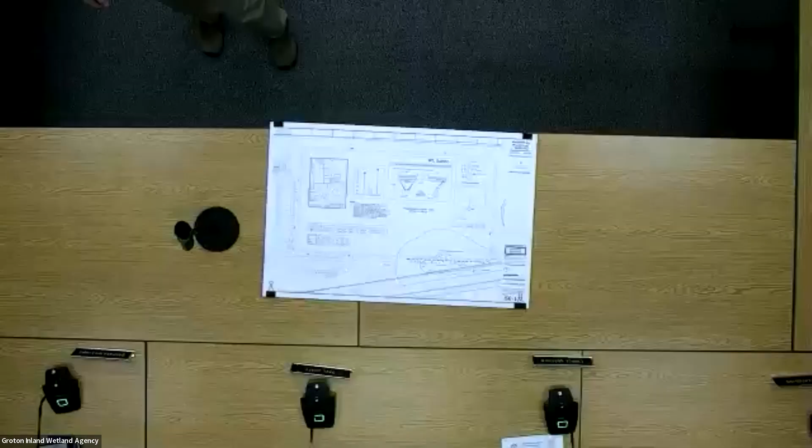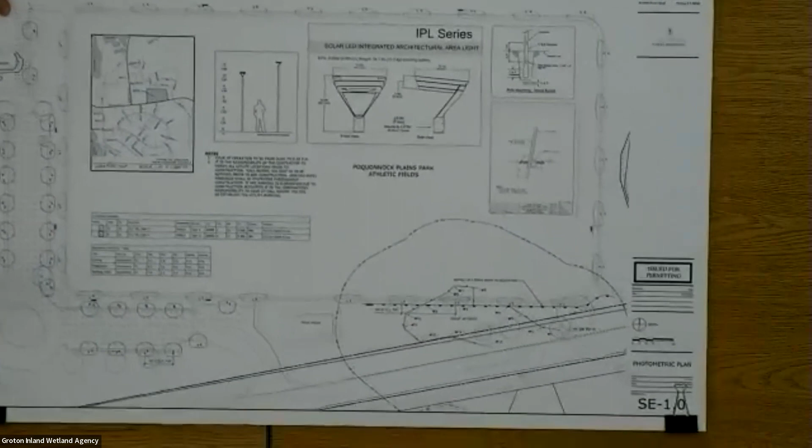This is Chad Frost from Kenton Frost. They were the landscape architects that put this plan together. And we also have the soil scientist that did the work, James Cowan. He is available if anyone has any particular questions about the soil.

As far as I'm concerned, from all the work we normally do, this is probably one of the easiest ones. So this is Poquonnock Plains Park. This perimeter is the walking path that we're all used to. What's labeled here, the field house, that's the bathrooms, the concession stand, the boulevard parking as you come in, this is the parking lot. Obviously, all of the circles are the lights that are proposed, as Mark mentioned.

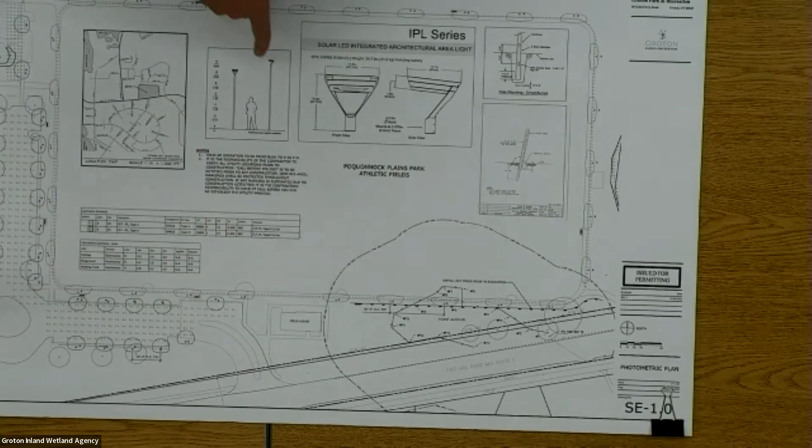They are all solar powered, so there's a solar panel on top of the fixture, the lights and everything underneath of it, and then it's a simple pole, direct burial. The only digging, the only soil excavation, is just for the pole, so we don't have any wiring, we don't have any conduit runs.

And as Mark alluded to, and as you've probably all seen as you drive along Route 1 in Fort Hill, this area is poorly draining down in that area. It's not a functional wetland, it's 100% lawn, it's mowed and maintained. And the walking path kind of just goes through the edge of it, as was flagged.

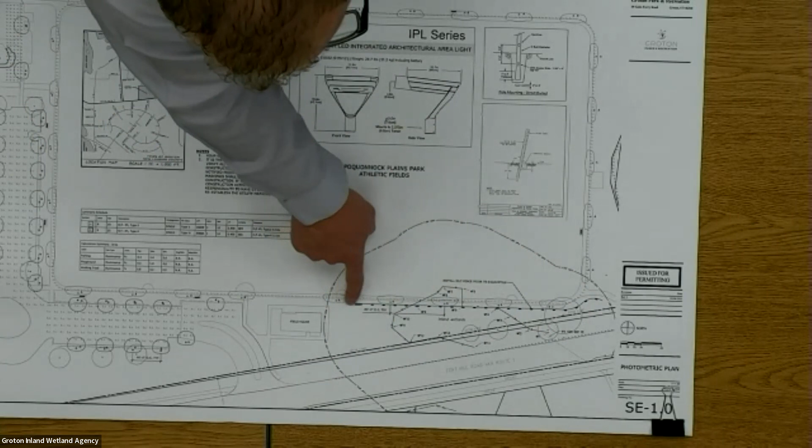It is slowly draining, but we have basically this light, that light, in that upland review area on this side. We have one light right there, and then these last two here within that upland review area. So extremely minimal disturbance, because it's literally just the pole itself. This is not going in with concrete, so it's literally just the pole, direct burial, recompact the soil that came out of the hole, and the light goes on, and that's it.

So I think extremely simple. I would say it's a dark sky compliant light fixture—nothing goes up, everything goes down. There is photometrics on here. These are very dim lights, they are not casting a ton of light all over it. It will be great to have the pools of light out there, but it really will be pools of light from pole to pole, as opposed to floodlights like you might be used to on athletic fields. So an extremely low level amount of light, just to provide safe access around.

And that's my short introduction.

Excellent. While you have James here, do you want to talk about the wetland for the agency? Promote him or just let him talk. Oh, these are his hands. They switch—oh wait, oh there it is, okay, there you go. Can you—perfect, okay, can you hear me?

Yep, yes, okay. Yeah, I guess the main thing I'd say is the main function of this wetland is drainage. It's at the low corner of the field, so any runoff or groundwater would enter this area, and it exits via a culvert in the southeast corner of the site. Where I have reviewed the plans and where the—

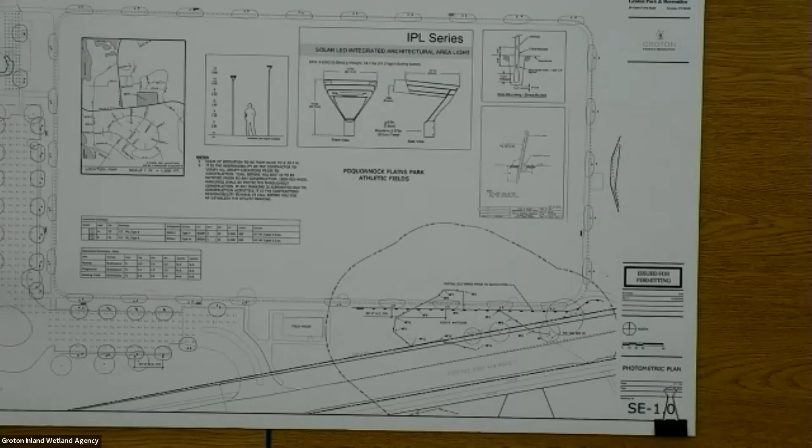Let me just say, do you think that we need some more presentation from these guys? Just saying. Thank you very much. Thank you very much.

All right, any other new applications that are not on this little list? Pending applications - Durr Driveway, 0 Elm Street South, Noank. I am promoting Ed Wenke, who is the engineer for that project. All right, Ed, they were...

Can you hear me now? Yep, we can hear you, Ed. Okay, the map - well, what are you gonna share? Are you gonna share your screen, Ed? I can do that. Okay, otherwise we can put ours out. I'll do both. Let me just make sure I'm doing the right one here. Can you see my cursor moving? Ken, does that sound muffled to anybody but me? Yes, he does. Am I just losing my hearing? Very much. Okay, sorry about that. Can you all hear me? Hang on Ed, something's funny with the audio, it's because we're trying out a new system. Okay, it's not me.

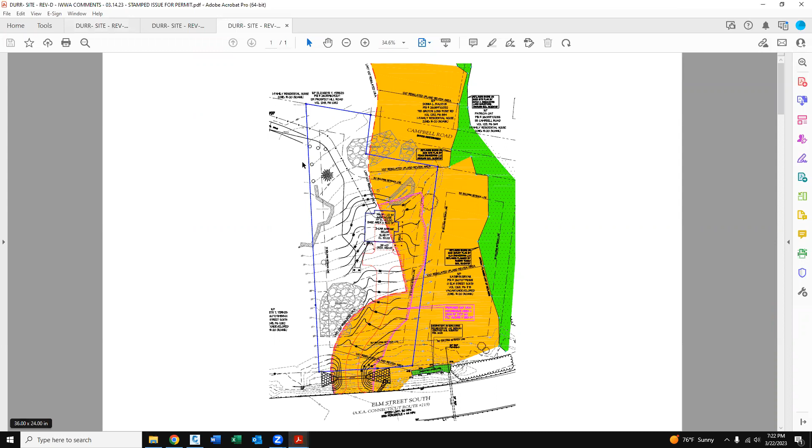The house itself is going to be 94 feet from the closest wetland. They say 94? 94, correct. That's the house itself. Basically, the limited disturbance line is running this line to the wetland area, that's going to be approximately 70 to 75 feet.

And you need to just be over there to have all the machines, is that right? We need to be there to catch grade as we're going to be grading this slope out to build the house. Okay, yeah, okay.

I guess I'm just wondering, maybe if we should consider having some plantings in there so that the people that mow don't get over-enthusiastic heading towards the wetland. Well, this isn't our property, so we wouldn't be mowing. I know that's not, but still since that whole corner is still in the upland review area, you know what I'm talking about? I get that they would want to mow around the house, but maybe just some plantings.

I don't know what that squirrely line is right there. Yeah, that's right, that's a limited disturbance. Yeah, this is the limited disturbance right here. That's the staked limited disturbance.

That's the edge of disturbance. So I'm just wondering if we might have a row of plantings, not trees, but shrubs there, wetland species shrubs.

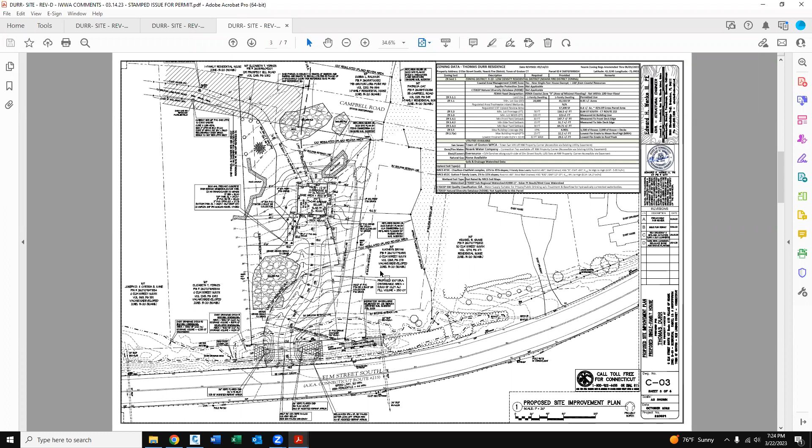It's so tight in there. So what he had said was the owner may want to put a fence there to keep them away from the wetland. That was one thing that maybe... I lost the audio there.

Ed, you still there? I'm still here. Can you hear me? Yeah, we can hear you. Okay, I can't really hear you. Yeah, I'm having a real hard time hearing you.

Yeah, the audio is pretty quiet right now. There we go, I can hear you. Can you hear me okay? Yes? Hello?

Well, if you can hear me, I just want to point out another thing we added here. We did add native shrubs and plantings in the lower southeast corner, along the lower portion of this slope before it hits that drainage ditch. So we've got a planting schedule, we're putting pepper bush in and some inkberry bush in.

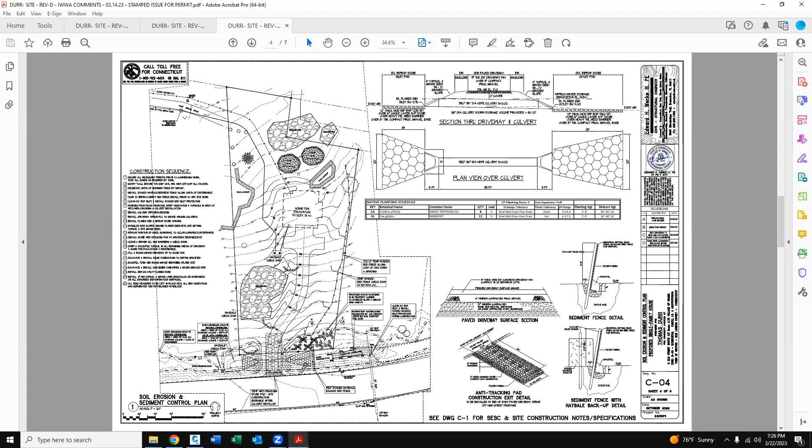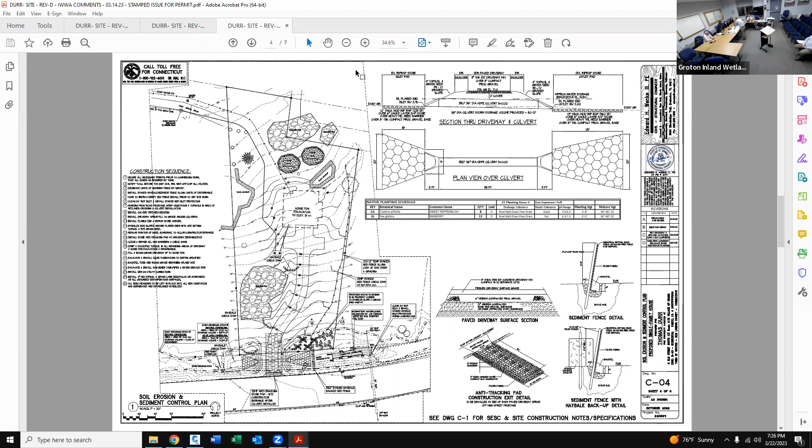Boy, I'm having a hard time hearing. Okay, so right now Dave is showing the agency our shared screen, versus the area where there's the big... This is Courtney, I can't hear either.

Can you hear me when I'm talking right now? I can't, I mean just barely. We're just trying to do the best we can, and I think we have a good sense of this.

So now could you just talk to me about the fence that you were just talking about? One of the things Ed had mentioned was that it's very tight between the upland disturbance, the limit of disturbance on the western side of the property. He said that the owner may be considering putting a fence along this edge here, which would keep them off of that.

I think this looks like it's about 25 feet, between the grading and the property line. Are we still sharing screen? Okay, I've got it right up here, you can see this line if you follow my cursor. That's the silt fence and the limit of disturbance, right up against the property line. There's no space, so the silt fence and the limit of disturbance is right up against the property line.

Now what, I mean that's basically the disturbed area, so I'm not sure what planting bushes along that would do. I guess what I'm saying, Ed, is I'm not talking about going towards the property line, I'm saying after your construction is finished, then you might put...

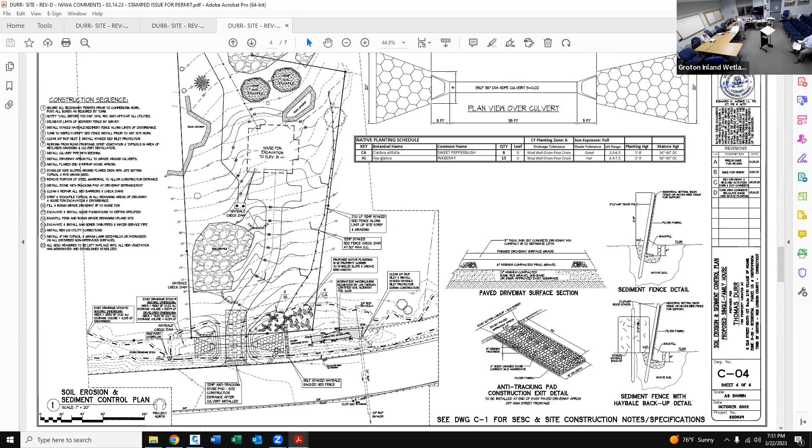That's what. Ed, do you want to stop your share? Plantings. And then you can see what they're pointing at.

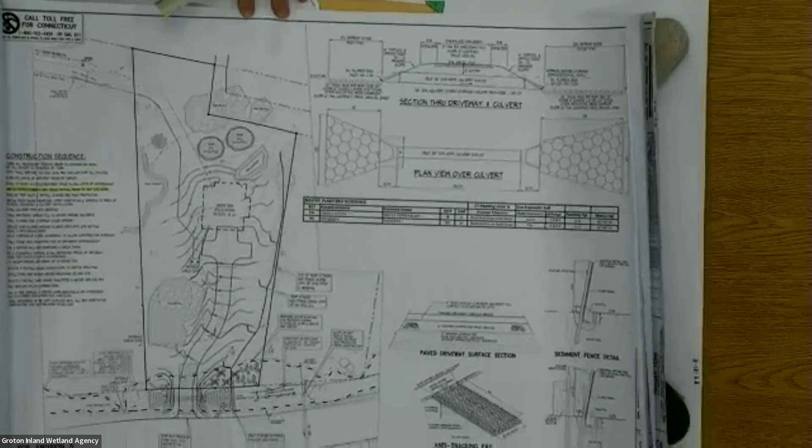You want to point in there again so we can see it specifically? So I would like wording in the motion that defines the limit of disturbance from here to here, please. All right, yeah, I mean, that is the property line essentially, so they're not authorized to go over the property line. So you just want to push the property line in 10 feet. Yeah, 10 feet, that's where the silt fence is essentially on the property line there.

All right, well. Okay, I guess that shoots that down.

I have a question regarding number one here. Since a good portion of the property is in the wetlands, the upland review area, how does this apply - to the entire upland review area or only the area east of the house?

The second line, the second one: this permit is subject to the standard conditions, blah blah. Wait, so I'm trying to understand which part, are you talking about the first part or the second part? Second part, right. There's no clearing, cutting, alteration, or dumping of materials shall occur within the upland review area that is not specified on the approved plan.

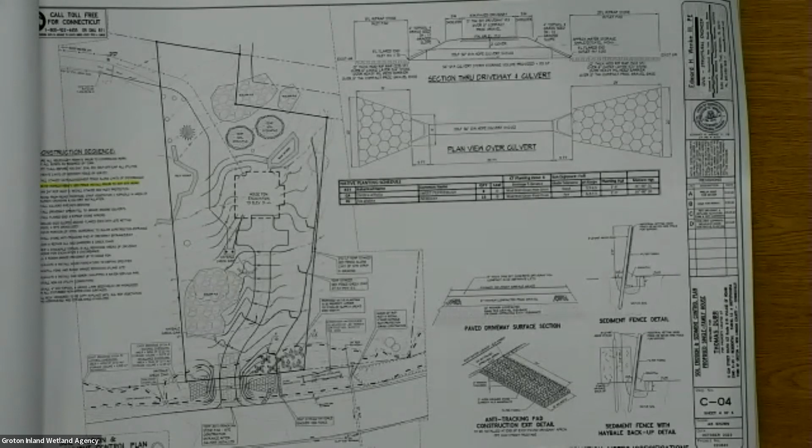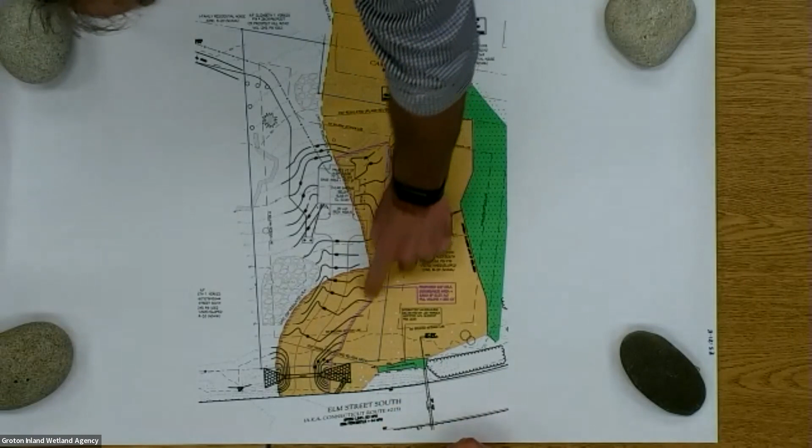You know, what else - it seems a little weird that the erosion controls don't cover the slope underneath. It's to the side, it's not below the house. So where you'd expect water and erosion to happen - the controls, I'm pretty sure, are coming down the whole. This mark right here is actually the erosion controls that follow it down, that basically follow the contours of the driveway and the house itself. So that makes - they're E&S in place.

Okay, so what's your question, Amy? Once again, nothing to do with the wetlands, just keeping the soil on the slope.

Well, I mean, we'd like to assume that good E&S accomplishes that - if it's attended to and if it's made sure that the plastic is in, the hay bales are there. You have hay bales and plastic, right, Ed? Yeah, we have sediment fence and sediment check dams running along the side of that sediment fence. We also have hay bale check dams coming down the drainage swale. So yeah, we've got plenty of sediment containment.

So what it's showing you, I'll mention it.

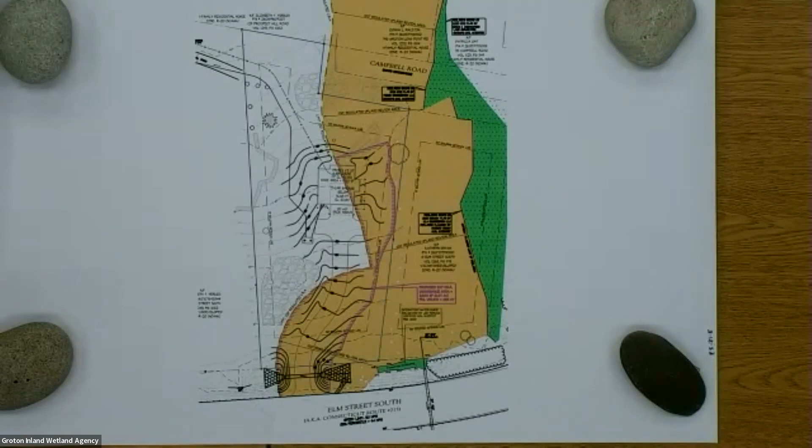So right there, while they're doing the work, you can see these are actually hay bale check dams - there's one there, one there, one down below, another one over here. That was the thought too, with putting the plantings down here to protect the water, the intermittent water course down in the area.

Now, you're proposing to add vegetation here. Are you talking the whole section from the house all the way down, or? Well, to me, it would be awesome if it was all the way down. It seems like it'd be kind of nice if they just carried that up. Visually, it would be nice, but.

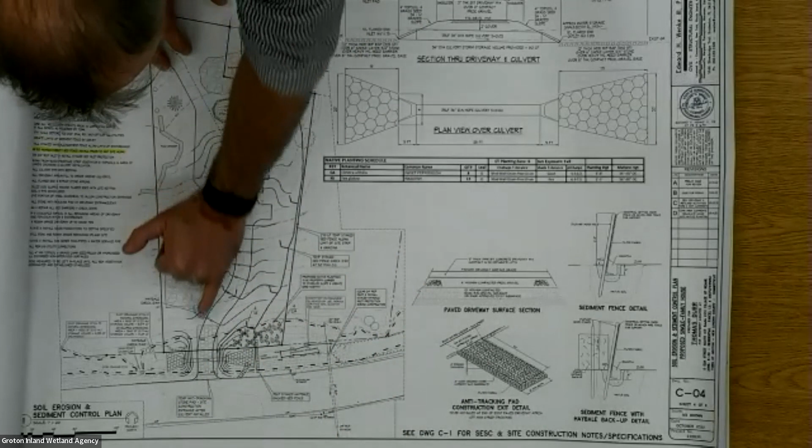Are there hay bales here too, along with the silt fence? No, not on this side. I think most of it's actually sloped towards the other side. You can see there's a swale depression on this side. So I'm trying to speak to Annie's concern about loss of material towards the wetland. I didn't realize there were consecutive ones. So you're good with that? I'm good with that.

All right, your concern is post-construction. Right, not during construction. That's correct, that's why I was looking at this from the standpoint of post-construction. And not necessarily what's on the building plans, but subsequently what the owner was going to do.

Well, but if we condition this, it'll be on the plan that they're going to plant. But they'll have to put those plantings on the plan.

All right, does anybody have any words for what I'm trying to accomplish in number 2? So you would like to say native plantings - let me clarify, you were saying 10 feet on the inside of where the sediment fence was? Yes, please. All right, so basically native shrubs shall be planted 10 feet off the limit of disturbance on the east side of the property, post construction.

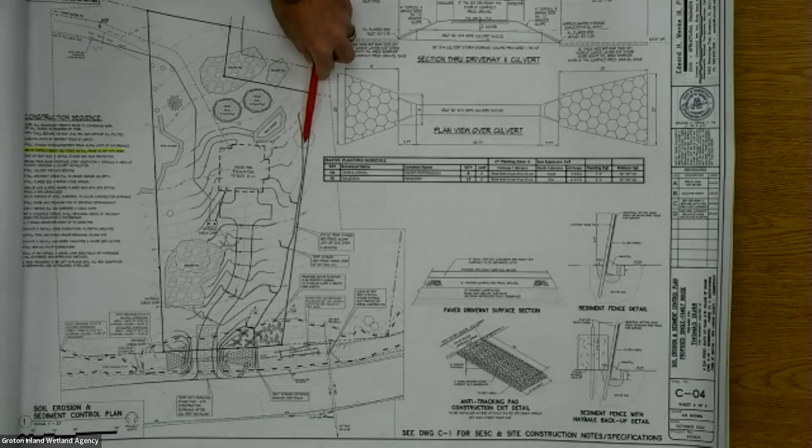I think along that whole property line, yeah. There isn't, I mean, there is - native existing shrubs and trees planted too, that's shown on this up here past the house. So when you say the house, you want to go basically from here all the way up to the existing tree? Yes, okay.

West, 10 feet west of the limit of disturbance. Can I ask one thing on this? Can you all hear me? Yeah, yes, he wants to ask a question. Yeah, go ahead, Ed. Again, Ed, I can hear you, I just can't understand you.

Oh, I'm sorry. If the owner decides he wants to put a fence in down his property line - that's where I thought we had the issue - that would basically address your issue of no encroachment any closer to the actual wetland.

So you're saying it's less disturbance and what? No, it's possible that the owner may want to install a fence along there rather than shrubs. And we're not talking about a stockade fence - it could be a post and rail fence, something low profile. I don't think anybody wants anything high there because everybody wants to maintain the views.

But the main concern is future encroachment of lawn mowing or clearing closer to the wetland than our property line, which we know we can't do anyway - the property line is going to stop us. A fence will stop you. And I'd like to be able to give the owner those two options of either providing the plantings or putting in something like a low profile fence. Does that adequately address what you're looking to do?

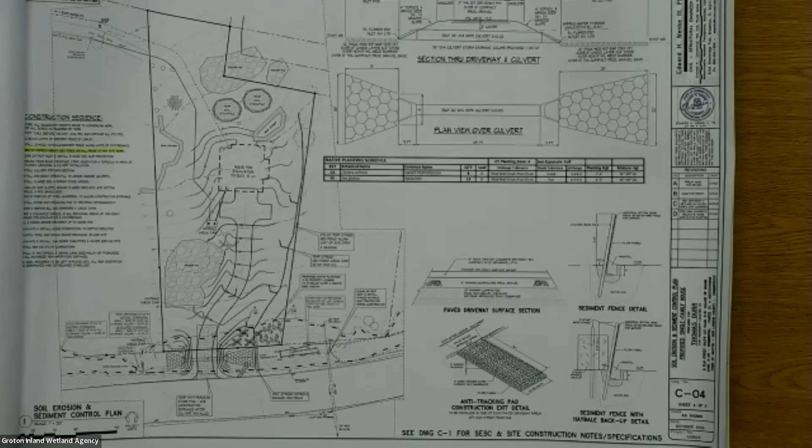Thank you all, appreciate your time. Thanks, Ed. If you have any more applications, you better come here - he's in Florida. All right, y'all take care. All right, thank you. Bye. Thanks, Ed.

All right, now we're on pending applications, Brown New Home. Oh, I hope - oh, thank goodness he's here. Yes, yes.

So far, so good. Did you? It's crazy. It's not just - yeah, no, I have my hearing aids on, so I couldn't hear much. Okay.

Okay, I'm Paul Lucier, I'm the builder of the house at 49 Prospect Street. And well, I think I've met you once before - Barbara Williams - with these folks a few times already.

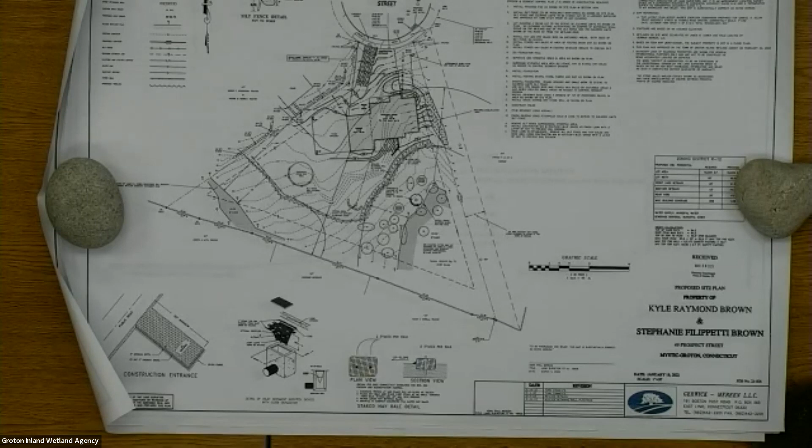Where is Prospect Street? Prospect Street runs parallel to West Mystic, or Allen Street turns into it - West Mystic, so it's parallel. This is the end of the cul-de-sac, so a little confusing, but this is the cul-de-sac right here, and the house sits right at the end of it. So just to bring you up to speed a little bit, what happened was there's a tree right here in the upland review area.

The tree is basically shaped like this, rotted in the middle. It's a red maple. Right, so it all began that we wanted to cut a tree down.

We didn't want it to fall on the house, and a bunch of limbs started to fall, so we thought it was probably a good idea to cut the tree down. So we came to ask, and we thought, while we're doing that, maybe we could put some plantings in and enlist the help of a landscaper.

And then we hired Jim Cowan to do a very good landscape plan for us. At the last meeting, we had asked to move this line to 25 feet and then blend it back into 40 feet. We backed that off, and went back to the 40 feet that was approved originally, and we left it where it was approved originally.

We kept the plantings exactly the way that Jim Cowan designed, and we still want to cut the tree down because it is really leaning toward the house. We also had another arborist come out, a company that does this, and I've made some copies. This is from All Habitat Services.

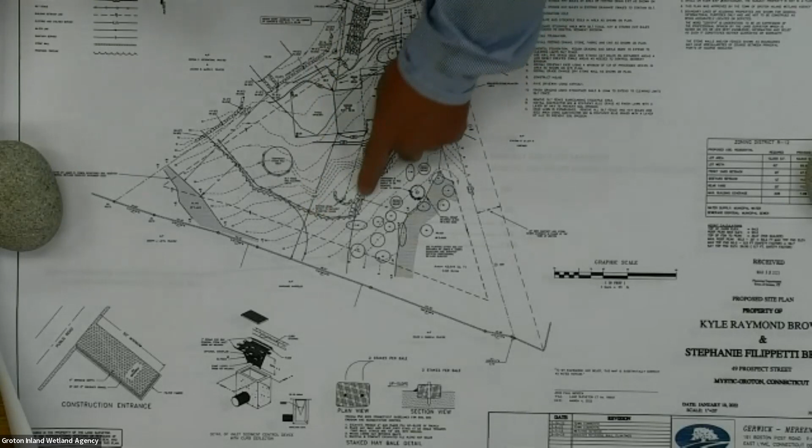I would build this wall. I bet. I'm almost done building the house. I'm gonna build this wall and leave. I don't care what they do with this, to be honest with you. I don't even like the tree, it has nothing to do with me. I just want to help them get the tree so it doesn't fall on the house.

Could we kindly separate these issues? Because I'm getting awfully confused. So one, we have a tree, you know, either let them take it down and move it out or let it lie there. Is there a problem with the tree lying there?

I can see where you probably wouldn't want the tree lying there. Yeah, I don't have a problem with them taking the tree either, but I have a problem with them messing with the undergrowth that's there. And I like Jim's idea, if there are two trees there that he's identified, they're already there growing, they're 20-foot trees already, little skinnies.

But he says when you cut this, you're gonna open up a lot of sunlight and those trees are gonna explode. So I think the idea of beautifying...

A non-disturbed area, see, the difference with the last application is that area we've been out in the field, that's already a disturbed area. We're trying to create some help for that upland review area. Here, I mean, there obviously has been some disturbance, the boulders and so on, but in that area where that tree is, it was pretty okay, not bad. It's ugly if you like a mowed lawn, but...

And again, that doesn't matter to me, I'm gonna make the other part of the land good. There you go, well, it doesn't matter to me at all, other than the tree. I would be in favor of just giving them a permit to cut the tree and remove everything above the stump, however high they want it.

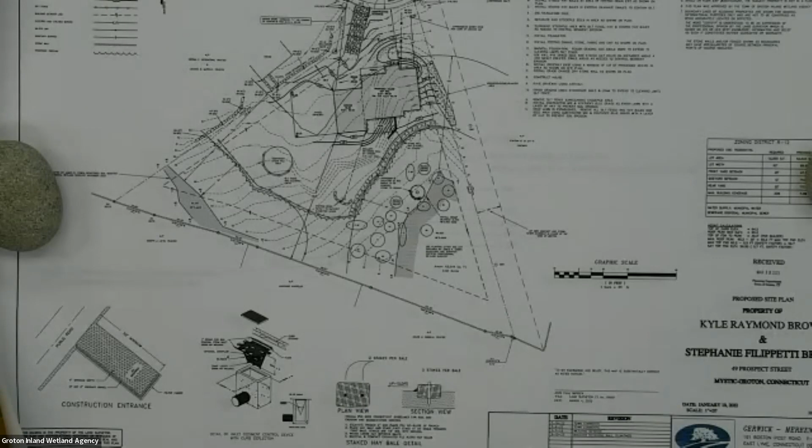Oh yeah, I read all this. Really? I'm very good, Deb. I forgot all about it, but I did read it when it was sent.

Okay, other new business—excuse me, this is all new business, our first new business. Any other old business? No.

The zoning text amendment application is a courtesy referral, but we got a long blurb about cannabis. There are two text amendments going to public hearing next month. One is to allow certain cannabis uses in certain zones under certain circumstances, as outlined in what you have. The other is to modify the accessory dwelling unit section of the zoning regulations to come into compliance with the state statute passed in 2021. Essentially it allows the accessory dwelling unit to be up to 1,000 square feet as opposed to 800, and it also addresses parking.

So we don't really have jurisdiction over this, and it probably doesn't have any wetland impact, but this went out to all agencies. Yeah, exactly. But I always like to say, thank you for referring this to us. Good job.